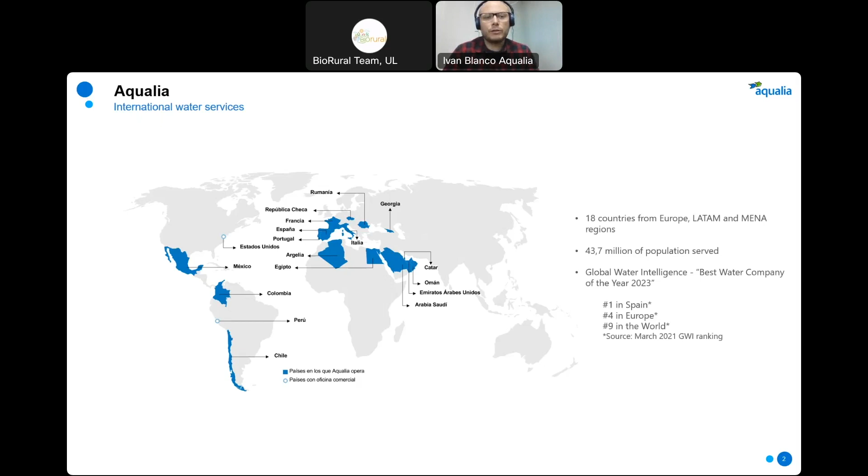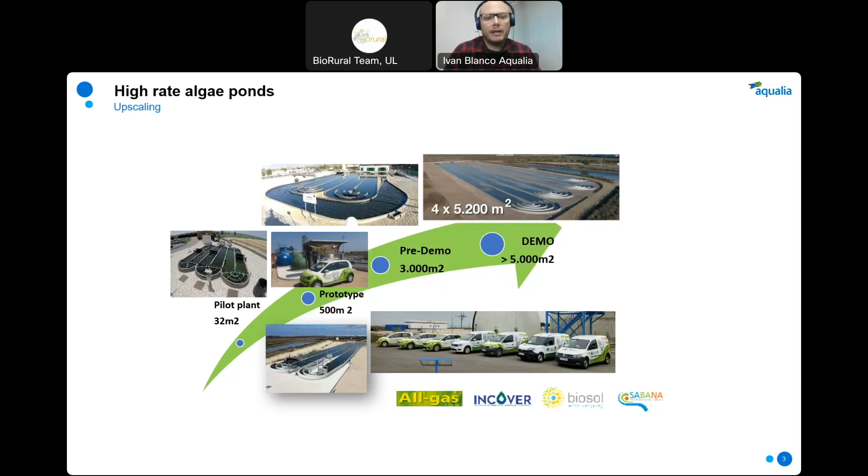Here also, these solutions have been focused on wastewater treatment and harvesting of biomass for anaerobic digestion, production of biogas, upgrading of that biogas that has later been used as biofuel to power a fleet of vehicles. Those are the pictures that show the cars at the bottom of the slide.

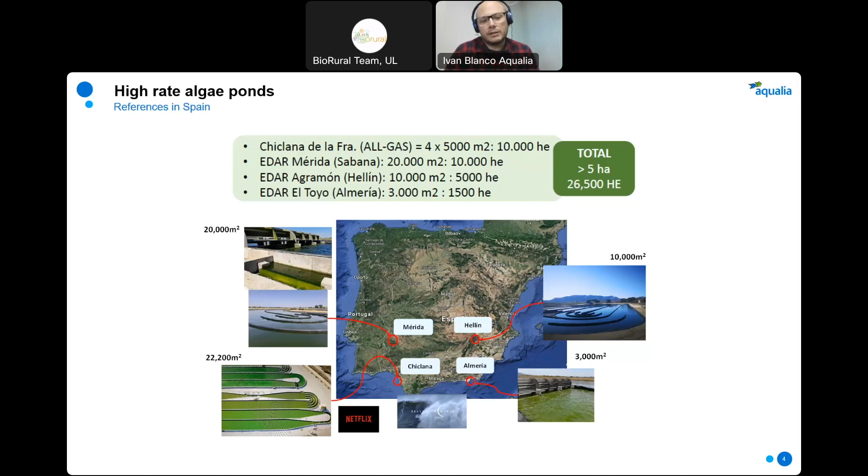Another slide just to show a few pictures of the high-rate algae ponds, highlighting the different locations, most of them in the center of the peninsula or below the center of the peninsula in Spain. So they receive more insolation and more hours of sunlight. Important to highlight this one in the bottom, Chiclana, where there was actually a documentary on Netflix, A Brave Blue World, that you can see if you log into the platform Netflix.

And today, we wanted to also discuss nature-based wastewater treatment, because in the context of the Life INTEXT project, funded by the EU, there has been a new platform of new technologies created in Talavera de la Reina, in the center of the peninsula. So a little bit higher in latitude than the other high-rate algae ponds that we described. And this one also has high-rate algae ponds. Here is the link between both solutions.

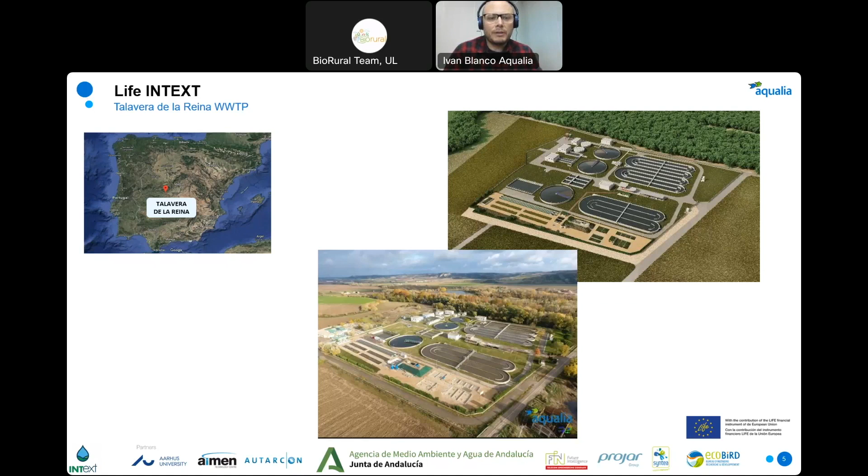And you can see here in these pictures, on the top, the infograph with the wastewater treatment plant in Talavera de la Reina, and the platform that has been built, and the drone view picture of this platform as it has been built.

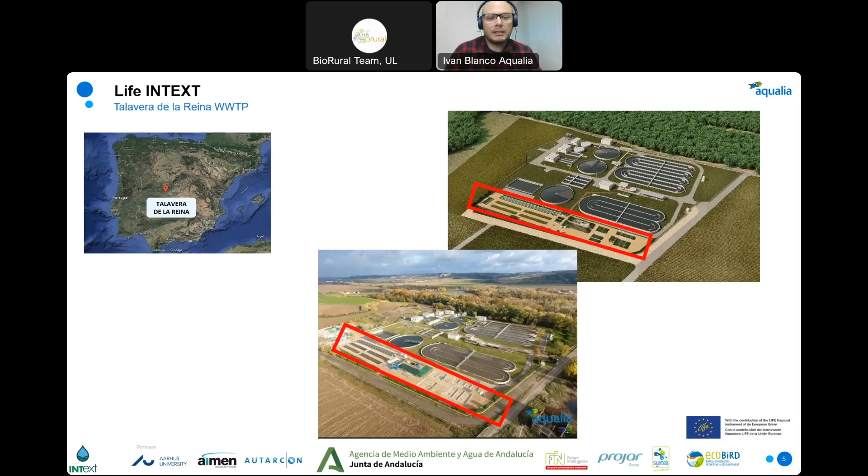So the concept behind this project was to find a middle ground between intensive technologies that require lots of energy consumption for wastewater treatment but have a low footprint, and extensive technologies that usually require large footprints but have a low energy requirement. Both of them have their own niches, their own uses, but there is a little bit of a gap in between these two types of technology, and that's where we are looking at intensifying extensive technologies, to try to meet a middle ground of around 0.2 kilowatt-hours per cubic meter of wastewater and 1 square meter per PE.

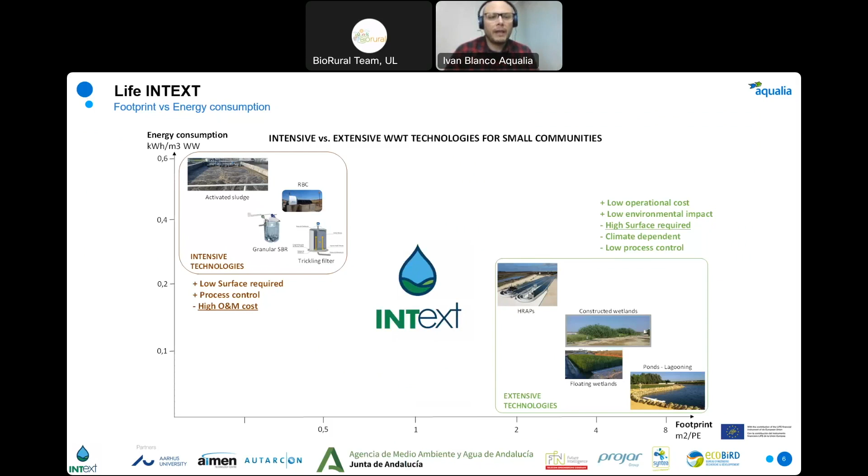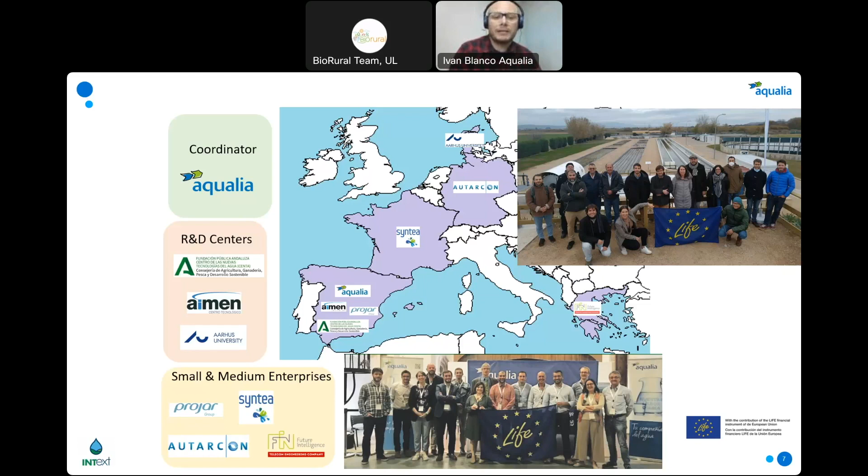Now, these small and medium enterprises look at wastewater treatment in small communities, and many of them are rural and remote communities. So these technologies are also focused on needing less skilled labor, which is more difficult to find in these communities, and also on less intensive maintenance, which is also a challenge in these locations.

To continue a little bit explaining the platform, highlighted in red here are the high-rate algae ponds that we're looking at in Talavera de la Reina, which has a different insolation, so that's part of the test that we are doing here. But yes, we have many different technologies that I will not go into detail on, but I will show some pictures.

And I think the important thing is that all of them are scaled up to 125 population equivalents, which means that visiting the platform, it's possible to see the area, the surface requirements for each of these technologies. So it's possible and easy to do a quick comparison for municipalities or for those engineers or practitioners who are interested in implementing this solution.

So we have all these sorts of technologies within the same platform, so we can do a quick comparison on performance, on operation and maintenance cost or requirements, and surface requirements, for example.

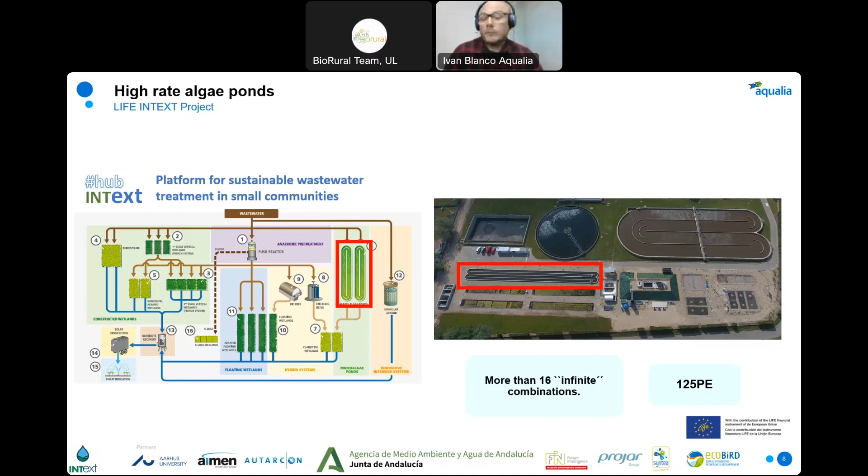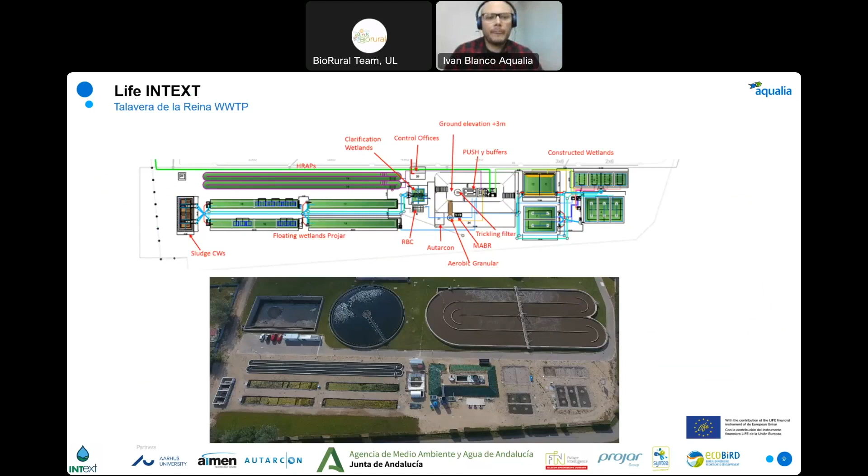Just a few pictures now on what was designed initially on the top, what was finally built, and here in the middle there is this hill where it's possible to have a nice view of the different technologies within the platform. Just a brief description of the technologies. Here on the left, we distribute by gravity.

In this picture in the center, there's an upflow anaerobic sludge blanket reactor, a UASB, that acts as pretreatment for some of the technologies, whereas other nature-based solutions in the platform can deal with raw wastewater directly. There are some hybrid technologies, so we have trickling filters, we have contactors combined with vertical flow constructed wetlands to capture biosolids from these technologies.

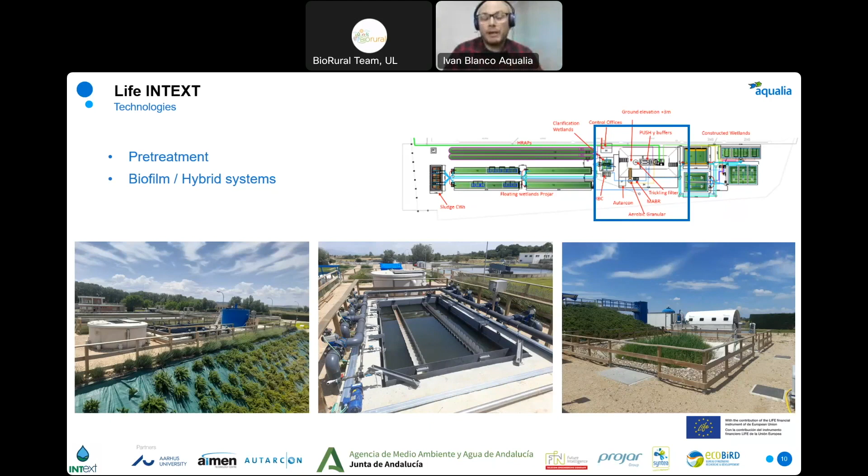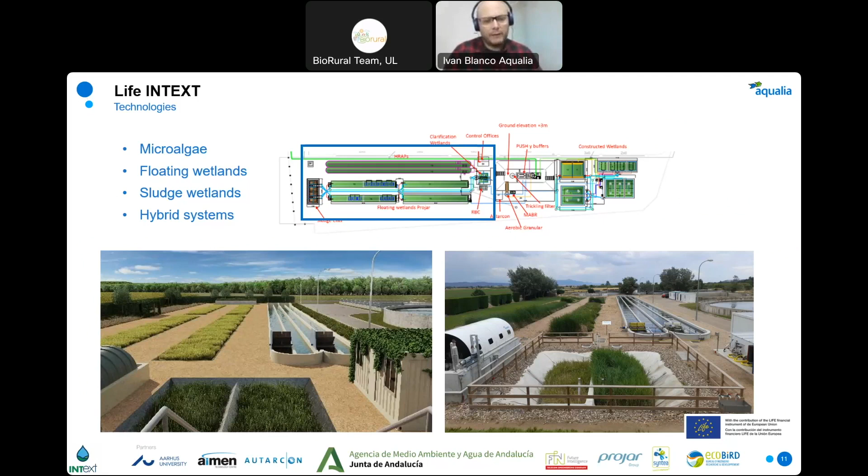Here it's possible to see the microalgae or the high-rate algae on the top right, floating wetlands on the top left. We have sludge wetlands, not possible to see here, but they treat the vertical flow wetlands to remove accumulated sludge from the wastewater treatment plant. Hybrid systems, as I was commenting, between biofilm systems and constructed wetlands.

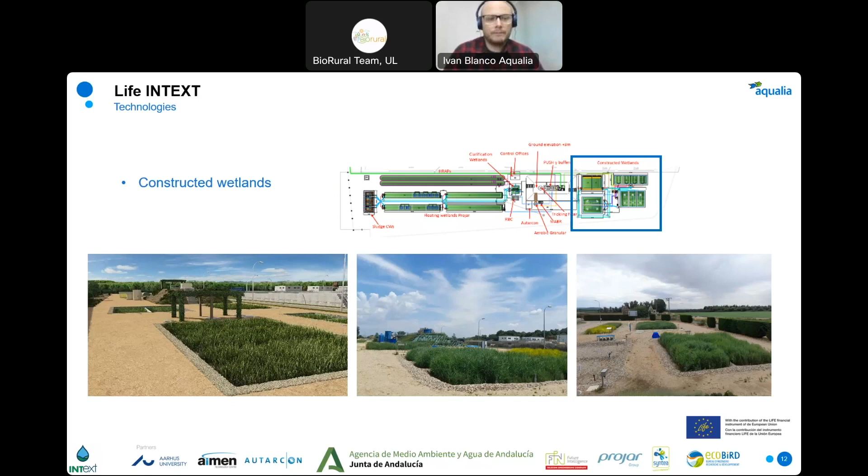We have lots of different types of constructed wetlands, some of them more classic, that can act as control to assess the performance, such as the French system, or two-stage vertical flow constructed wetland systems. And then we have intensified wetlands with forced aeration, horizontal flow, or vertical flow in different stages. So you have lots of different types of wetlands and other types of systems.